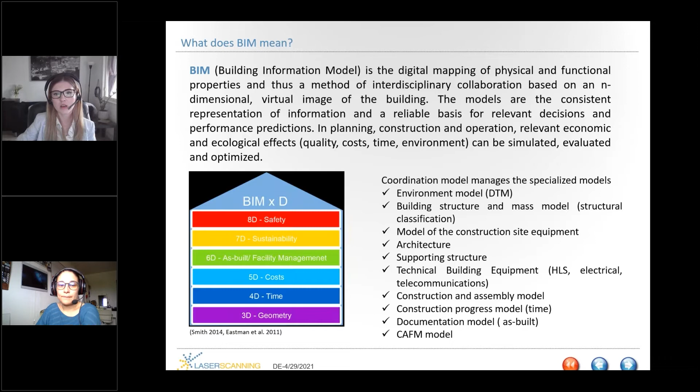The next topic is the BIM life cycle, as said in the agenda. And here I would like to talk where we currently stand with the modeling and the scanning acquisition strategy. This can be very well explained in this life cycle of the building. So the life cycle of the building begins with its construction and ends with its demolition. In between these two phases, the building will be rebuilt or extended depending on the requirements.

Then, the BIM method helps in the planning and execution of this rebuilding. And then with the help of BIM, the building can go back into operation more faster. Since we are mainly working in existing buildings, not in planning new buildings, it means that usually the building is already built and has been used for a while, and now it's just a matter of planning the remodeling phases. This is where scanning and modeling comes into the BIM process. And at the end, after everything is done, the building will go back into operation.

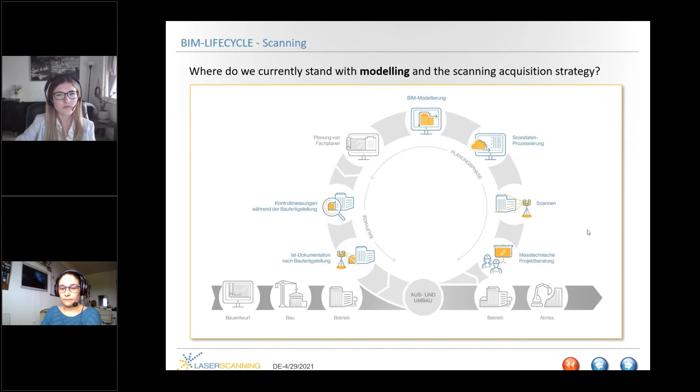Then the next point, to explain more clearly what's meant with a life cycle, I have tried to distribute that into the service phases according to the architects, named HOAI. For example, we have service phase 0, which means the feasibility study, and this doesn't really exist in the literature, but since scanning and 3D models are already used in this area, I have also listed that in here.

Then in service phase 1, the basic design, it's a bit more clear—it's more focused on the as-built determination using scanning and 3D models. The service phases 2 through 8 are actually the construction phases, and I will not go into detail with that. And then at the end, we have service phase 9, the project support and documentation.

As mentioned in the life cycle, it's very interesting for a lot of customers in order to manage their assets. To give you some examples from practice and not just talk from theory, what these service phases actually mean, and how this looks like in the modeling area.

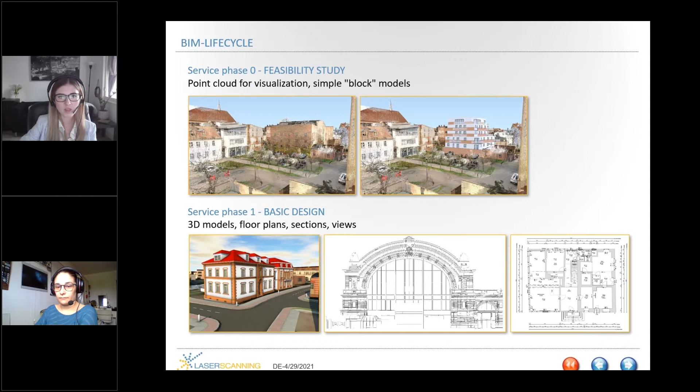Then in the service phase 9, the project documentation and supervision, as mentioned before, it is often found for facility management that they need a 3D model in order to see exactly what the as-built stand of that building is. So we can see that 3D models can be used very flexibly, and that modeling and scanning can always be found in the entire BIM process.

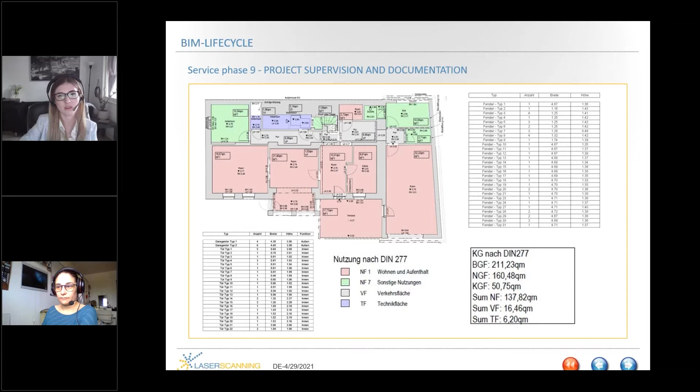Then going to the next point, 3D versus 2D modeling. Does it always have to be a 3D model? Of course, a lot of questions have arisen. Why aren't the 2D plans still all right? They have been used in the past over many years, and they have proved to be good and to show the situation on site. The 2D model doesn't have to be necessarily worse than a 3D model. It depends on the application, and it depends what exactly the customer requirements are.

Exactly for this subject, we have on our website a case study where you can find more information about it. I will just talk about a couple of points from this case study in case you want to read it and go a bit more into detail. You can just go on our website and you'll find the case study there. For the webinar, as I said, I have only taken a few points.

Talking about the basis of 2D or 3D modeling, they are basically the same. We can use hand measurements, we can use surveys, we can also use scan data from laser scanners and drones, also pictures, images, or even old plans of the building. It always makes sense to basically combine all these means, all these methods, and to be flexible and integrate additional information from one or another as-built plan into the model.

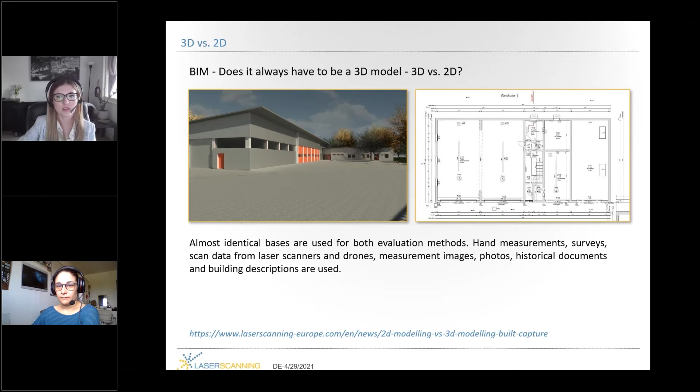The major differences between 2D and 3D in further processing - the first one that I'll talk about is the accuracies and standards. In 2D modeling, the standards and accuracies have been already very well established. We can talk here about DIN regulations, control values. These are very well-known terms already that both modelers and customers know, and they can use them in order to define their requests. Basically both the customer and the modeler are speaking the same language.

When it comes to a 3D model, though, it's a bit more complicated right now because the 3D models and these BIM standards were mainly made for planning projects for new buildings and less for existing buildings. Therefore, these standards and the LOD that are defined are not always so clear.

Then the next point will be the measurements true to deformation. So here is also quite a big difference. In the 2D modeling, we are going to create sections or layouts at a defined position, and it's very easy to create these plans according to the deformation. So we can draw, for example, an inclined wall, or we can draw very easily the deformations that we see in the scans.

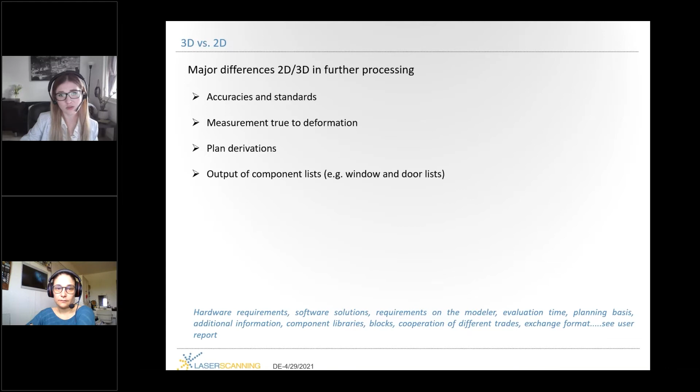Another essential difference between 2D and 3D modeling is the output of component lists, for example windows or doors. In 2D modeling, these component lists are usually created manually and handed over as documents like Excel or Word files. In this process, duplications or other errors often come in between. Whereas in 3D modeling, these component lists can be generated automatically, so error sources are minimized.

Another point is clash detection, the collision analysis. For 2D, the 3D modeling definitely has an advantage. With a 2D plan, or even more 2D plans, it's quite impossible to do a complete collision check, because only certain areas are shown and the whole building is not considered. Detecting these collisions only by lines and heights requires a very high degree of knowledge of the situation on site. Whereas with the help of the 3D model, the collisions can often be eliminated, and it's very easy to find the points where different objects might clash.

In addition to the collision check, and in connection to that, is also the visualization. In 2D plans, the spatial presentation of a building is quite difficult to make. So for visualization purposes, sketches are made, maybe some pictures can be rendered, but the 3D model is basically perfect for visualization, and in combination with a point cloud, the customer can see exactly how the area looks, and also do further planning. Moreover, with the help of VR technology, the customer can actually move through the model and understand much better what everything is about.

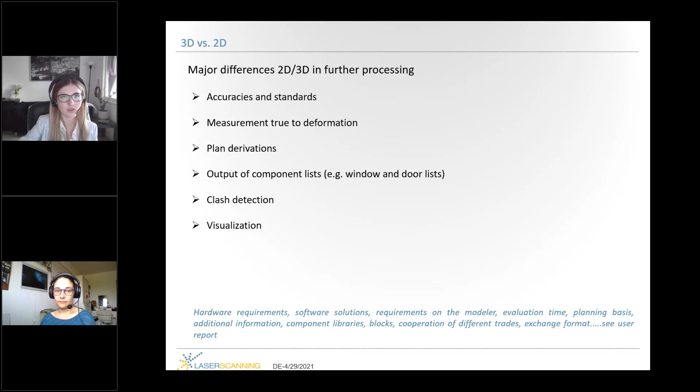Since theaters have a lot of guests, some of them bring their own equipment, and this can lead to different issues. So the customer just wanted a model to give to their guests beforehand, to see how the stage design can be realized, how the lighting technology works, what the space conditions are like, and a lot of other questions that can be easily answered using a 3D model.

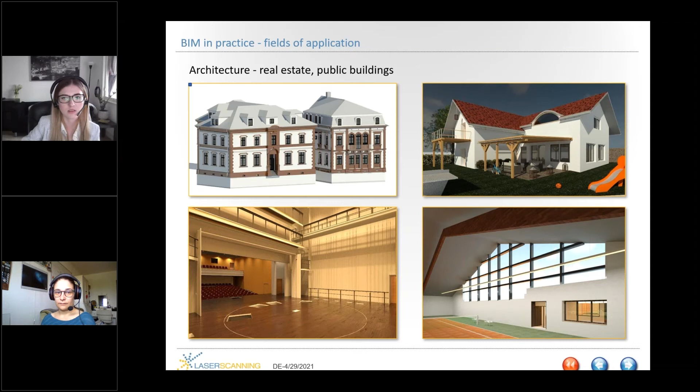Another field of application is specialist planning, for industry, piping systems, wastewater. We are receiving more and more requests for the creation of user-specific data. Usually these technical rooms are very full, with little space to expand or plan something. The projects my colleagues usually work on have as their main purpose remodeling. They only want to see what the space conditions are, where the collision points are, if there is any space for new objects.

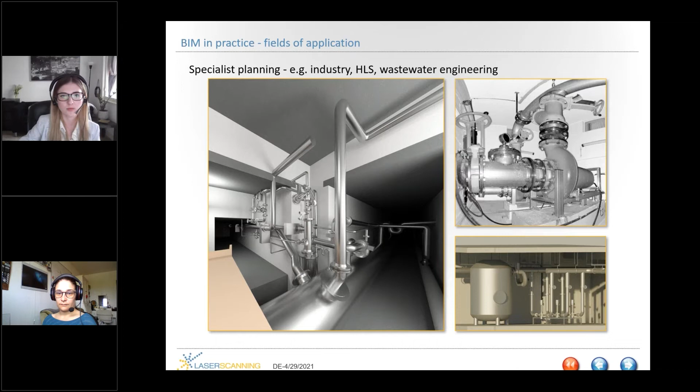Another field of application is infrastructure models for streets, bridges, or rail facilities. At the moment our colleagues are working on a project where a highway is being expanded. The client wants all the node points and the route modeled. The new highway has to pass through existing bridge structures, which is why the bridge structures have also been included in the BIM process.

In the area of modeling the roadway, this BIM model has also been used for quantity determination in excavation, and the areas next to the roadways were again used for new planning and possible further expansion.

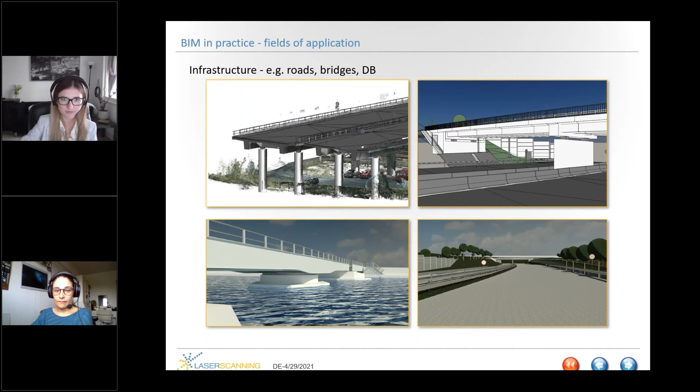Another field of application is facility management, which I mentioned before in the BIM life cycle. This is becoming more and more popular, as customers request management of their building using a 3D model. In this example, we have a school where more space is needed for more students. Using a 3D model, it's quite easy to see how the space can be optimized, how the access routes work, and make other observations.

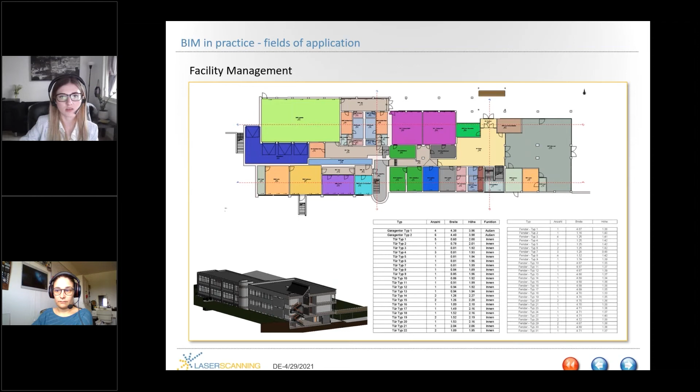Then for exhibition stand construction and event planning, here it's mainly about visualization, especially in event planning. The customer can see what the location is, what kind of event can be made there, how it works, and how certain areas can be optimized. The building envelope always plays a big role, and you can plan all these events with the 3D model.

Another example: for exhibition stand construction, exhibition builders can also use the 3D model to plan the exhibition, in order to determine the locations of individual exhibitors, calculate cabling, and so on. As you can see from all these examples, 3D modeling has a very wide range of applications.

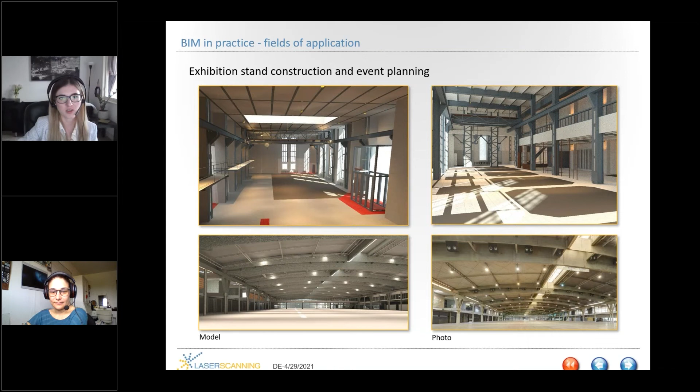Now moving to the next point, I'll talk a bit about classical and parametric modeling. What does this exactly mean? In classical or direct modeling, the focus is mainly on pure geometry. Imagine a sphere or a pyramid, or this kind of very simple 3D object.

These objects are represented by surfaces and solid models, and you can always change their geometry using CAD software tools like scaling, rotating, and stretching. This kind of modeling is basically used for as-built modeling and can be done very quickly and easily. It's meant for complicated models where objects have to be captured realistically, and there's no need for dependencies with other objects.

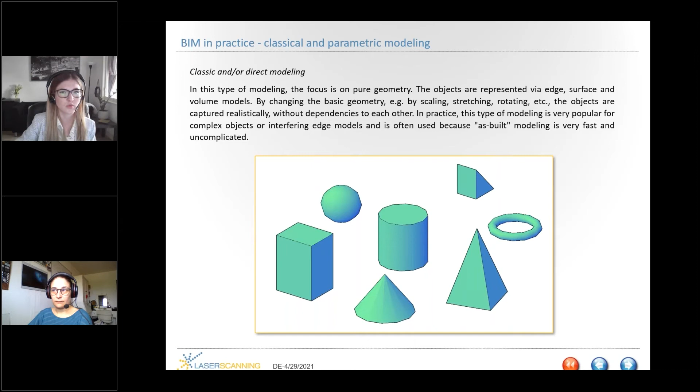When it comes to parametric modeling, things get a bit more complicated. In addition to the geometry, parameters or attributes are added to the objects, and these objects have dependencies between each other. For example, for an object we can add the material, the dimensions, the colors, regarding the dependencies. So a window depends on the wall, railings are related to the stairs, or fittings are related to the pipes.

If I remove a wall, for example, the windows placed on that wall are going to be removed as well. So a change in the main element results in a change in the sub element. Unlike direct modeling, this requires more experience to create a 3D model. You start with a sketch, then geometric parameters are added, like height, radius, rotation, and you can assign many other additional attributes. A unique model can be created for every object.

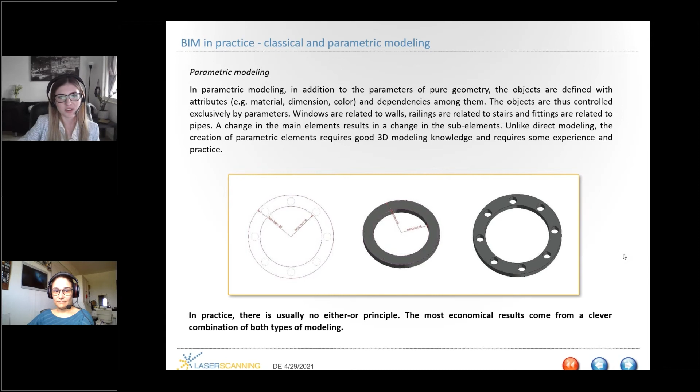Now going a bit deeper into BIM modeling, the LOD. The LOD is the level of detail, and it basically describes the geometric requirements for different components. It specifies for the modeler, as well as for the customer, how detailed the construction element should be modeled. If you research this, you'll notice that the LOD and BIM strategies were developed mainly for new constructions.

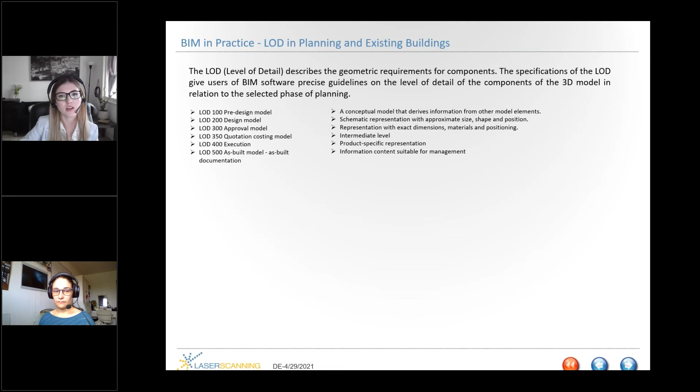Geometrically this can be quite quickly classified, but when looking into the description of the LOD, taking for example LOD 300, the approval model, it states representations with exact dimensions, materials, and positioning. The dimensions are correct, the positioning is correct, but how about the materials? It's quite difficult most of the time to define the materials, since the modeler usually doesn't go on site.

Maybe we are working with scan data, or maybe even the surveyor has been on site and had a look at all these details. However, it's hard to visually estimate what kind of material has been used, or for pipes, what inner diameter or pressure rating it has. All of these questions cannot be answered by the modeler. This is the essential difference between modeling for planning purposes and modeling existing buildings. When modeling existing structures, this level of detail often cannot be filled only by the modeler. The modeler can describe the exact geometry and positioning, but afterwards an expert could come in and complete the other LOD requirements with missing information which the modeler cannot take from the scan data.

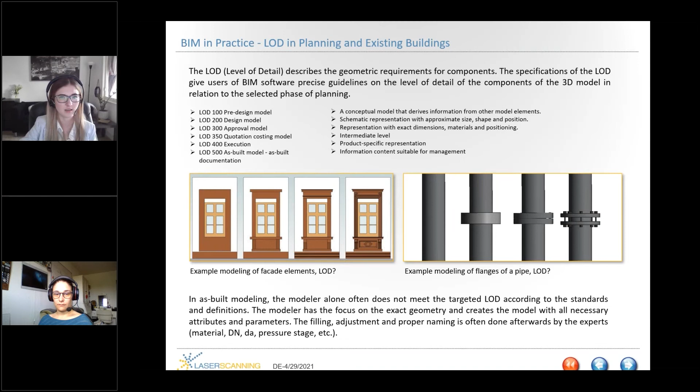Talking about accuracies and level of detail, most of the time when customers call and we discuss this, they want everything as accurate as possible. But is that realistically advisable? There are some examples where, when considering these accuracy requirements from a different perspective, we reach the conclusion that this is not always the best decision in every case.

As in every project, good consultation in advance often changes this statement, and then the accuracy requirements are balanced against the effort and benefits. So some customers say, okay, I don't need this model as accurate as possible. It works within certain tolerances, and that will actually reduce the costs and time needed for modeling an existing building.

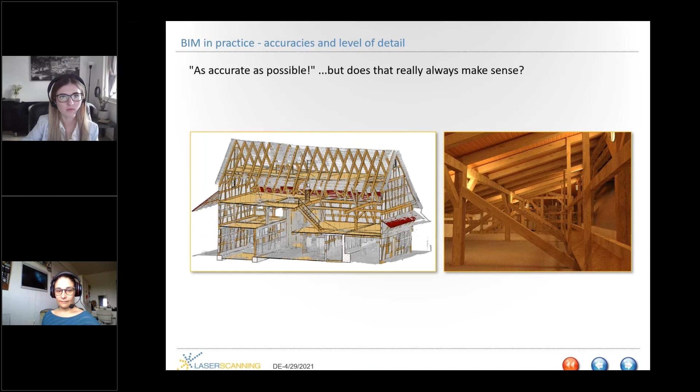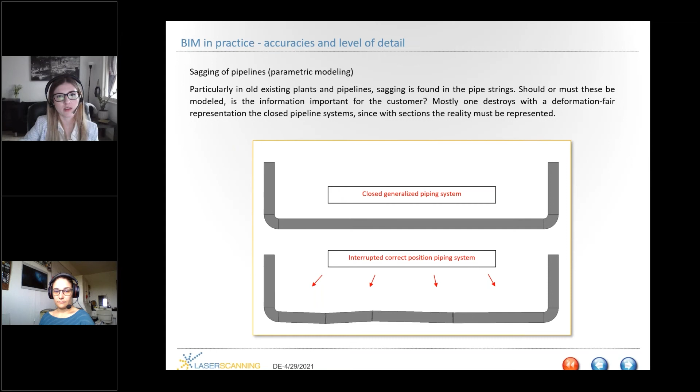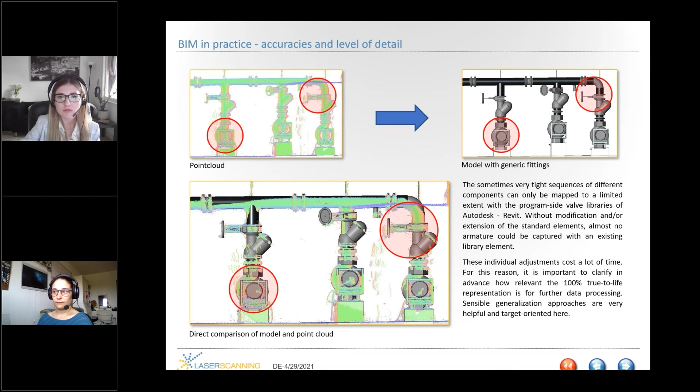So as I said, this 'as accurate as possible' approach is not the best decision in every case. And as already mentioned, consultation in advance often changes this statement, and then the accuracy requirements are balanced between effort, cost, and benefits. Most of the time, a combined solution is the best choice, bringing the best results.

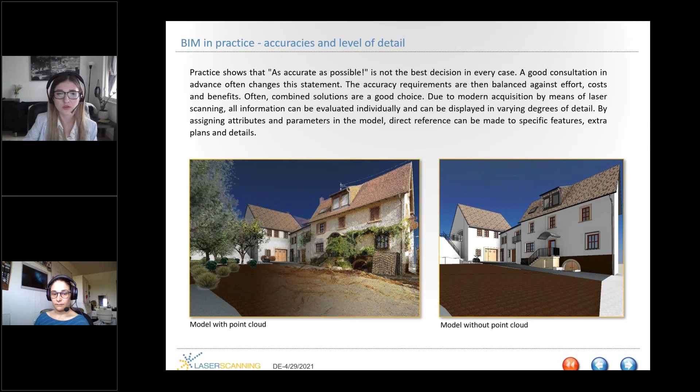Another very important point: oftentimes different media come together, for example drinking water, cooling, heating, electrical engineering. So what does the modeler need to know? How much of all this information does the modeler have to know?

From experience, it's advisable that all of this information be specified or verified by the appropriate experts. With parametric modeling, the components can be described and specified clearly. The libraries offer most of the time a variety of accessories, but deciding which type is 100% the right one is very hard to define.

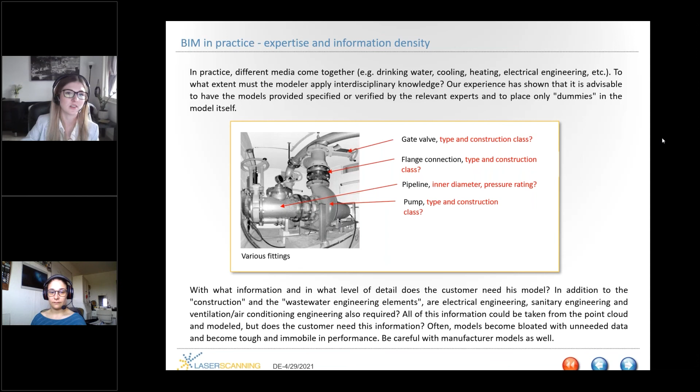Talking about export options - the IFC exchange format. When sending over the models to the customers, we usually use this IFC exchange format, and in this all the geometry data as well as the attributes and classifications can be found.

However, depending on the CAD software you're using, it might be that the model cannot be further edited in that CAD software. It can also be that when imported into another CAD software, part of that information is lost. For that reason, it's very important to understand what the model should be used for - whether you need to directly import it for further processing of the data, or you just need it for visualization.

So what exactly is the model for? In the company, a project report is usually made where a lot of information is given to the customer regarding different attributes or objects found in the model. That's because most of the time the end user never talks to the modeler, and without the project report or this information we provide, it would be quite difficult to actually understand what's in there.